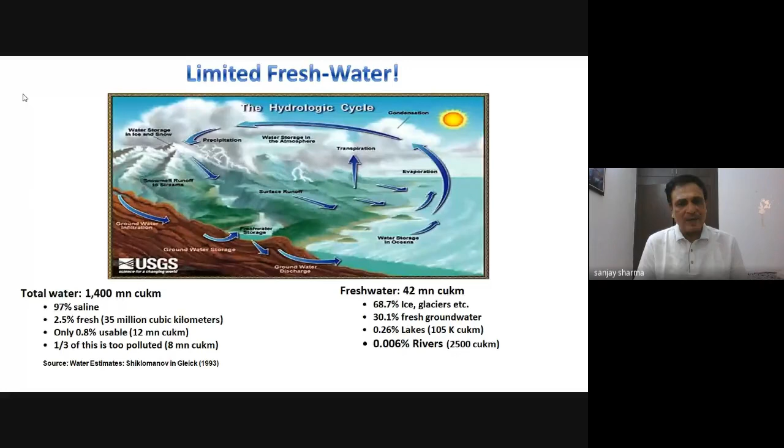If we talk about the availability of fresh water, no doubt our earth is almost 97% covered by water, but availability of fresh water is very, very less. The total water is 1,400 million cubic kilometers, and the fresh water is only 42 million cubic kilometers.

And the thing is that the same water that existed on Earth billions of years ago still exists today. But two or three days back there was news that glaciers are breaking down, and the California fire, because of the rise in temperature, etc.

So the balance I am talking about is that whatever the input is, the output is globally in balance. We have precipitation, then we get runoff, some part evaporates, goes to the sea, and precipitation occurs again. If you total up these things, it will be almost constant.

But what is happening in between is that this storage is missing. This particular ΔS value is missing in this equation. I said it is balanced, but you will find it is not exactly balancing; some amount is missing. That amount is ΔS, the water storage change.

So locally the input and output should match, and here this ΔS should come into the picture. That is what is happening: precipitation, soil storage, evaporation, runoff, discharge, etc.

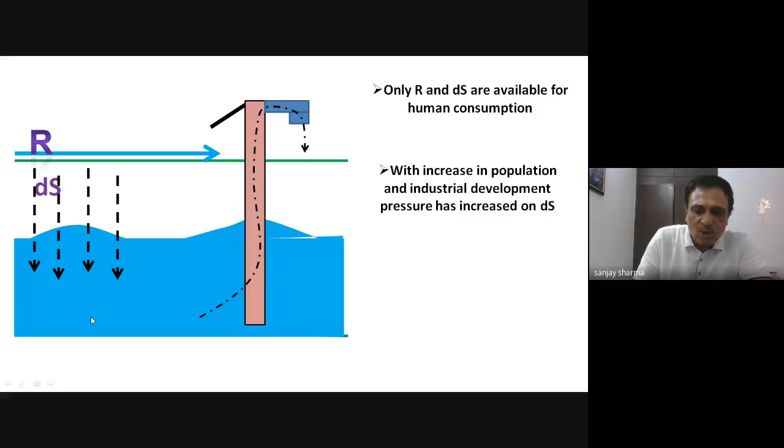So you can see that, just shown in an animated manner, water going underground is sometimes available for consumption, but with the increase in population and industrial development, pressure has increased on this, and in most locations, in particular in our country, this groundwater storage is also going down. So the aquifer is emptying. With increasing population, the stored water has already been consumed.

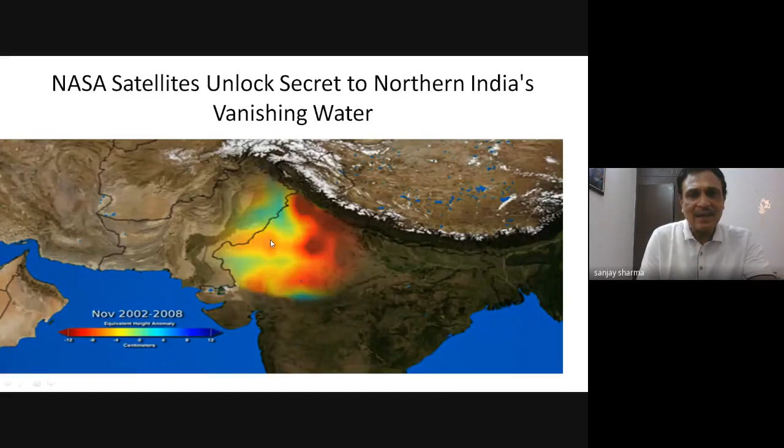So in our country the problem is that we get a good annual rainfall, but the storage capacity of India versus the world is very low. In India, we can only store up to 30 days of rainfall, whereas in developed countries like the US and Australia, they can store up to 900 days of rainfall. So that is what is happening.

Sorry, automatically it is going.

So regarding water availability, we all understand the reasons: vast development, urbanization, population outburst, elevated living styles, inadequate water supply arrangements, decrease in rainfall, and excessive withdrawal of groundwater. In most of our cities, we don't get water supply more than 8 hours per day, and many cities get about 3 hours per day. So there is this shortage in water supply.

And like Cape Town, which was declared a zero water city by March 2020, I think, many of our bigger cities, Bengaluru, Delhi, Mumbai, Kanpur and others, have been listed under zero water in the coming few years. This is the Earth's water distribution we have shown earlier. Only 3% is freshwater, though it is a blue planet.

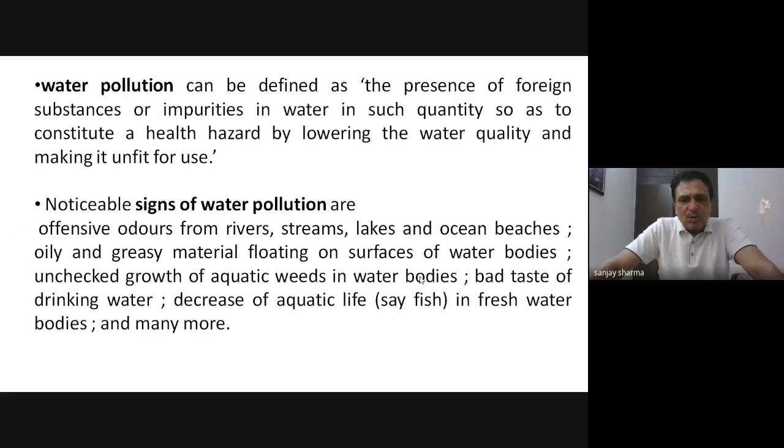The same thing has happened with our freshwater bodies. First it was contamination, and now it is pollution. Our major water bodies are not fit even for aquatic life. So whatever the signs of water pollution in river water bodies, we must take actions to control water pollution.

So if we go into the sources of water pollution, there are natural sources of pollution because of the weathering of rock, soil integrity and leachate from animal excreta. Then agriculture pollution due to utilization of fertilizer, insecticides and pesticides. Then mining pollution of water due to mining, and municipal pollution of water due to sewage.

Mostly in our country, 80% or 90% of the problem is due to municipal pollution from wastewater being thrown into water bodies. Industrial pollution of water is also because of effluent from industries being thrown into our water bodies, and sometimes accidental spillage happens, like oil spillage or industrial spillage.

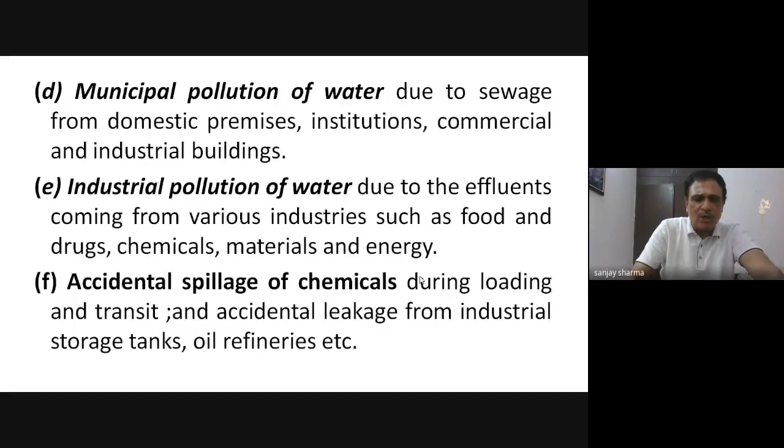So these parameters basically impact water quality. Most diseases, about 80%, are water related diseases, and the impact of water quality on humans is very drastic. So you have health effects of poor water quality, waterborne diseases, water related diseases, and then usability effects of water quality include reduced availability, expensive treatment, economic unavailability, and effects on vulnerable populations, so poverty and the privacy and dignity of women.

Recently I have seen a simple wheel-based system where women can use it instead of carrying buckets on their heads, so they can use this wheel-based system for bringing water from the lake. And then aquatic life is also getting protected.

So basically our water problem is fast becoming a hunger problem also. 1 in 5 people do not have access to safe drinking water, and according to the UN, a child dies from a water-related disease every 15 seconds. So we have kept a Millennium Development Goal to improve our sources of drinking water and sanitation by 2025. To achieve that goal, we need treatment.

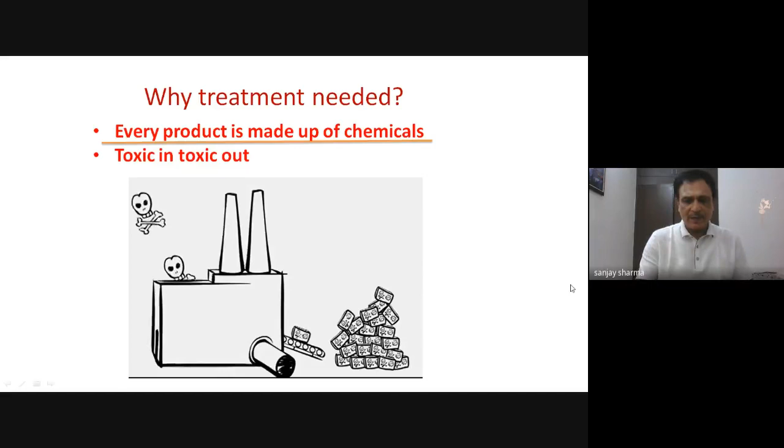So whatever we are doing, we get this outcome: if you put in something A, you get two things, B plus C. B is a useful product, and C is your waste product. That waste has always been a problem for human beings, but we are trying to control it, those terrorists and all that are killing lesser numbers of people than those being killed by our polluted water. And that is affecting us genetically also, as civilization is getting affected.

So for water availability, we have to see one is the judicious and efficient use of water, that is avoiding wasteful water use. With more wastewater production, we must think that whatever it is, it is not a waste, but it is a resource.

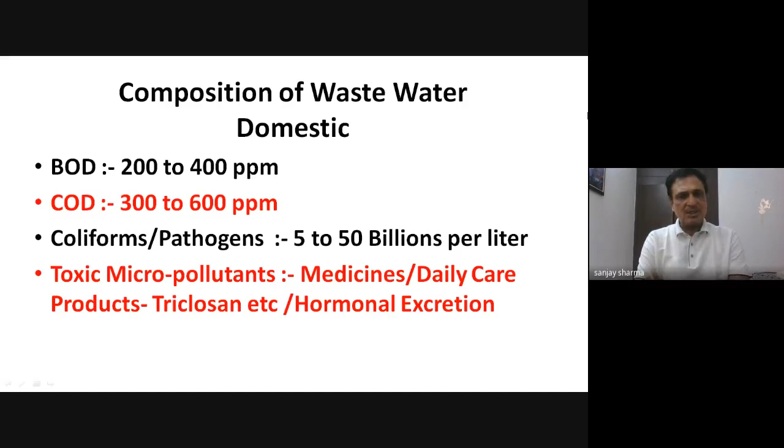So whatever waste we are generating gets circulated. 80% of water sources are highly polluted because of pollution as we have seen. When we come to the composition of wastewater, like domestic wastewater, we generally get BOD in the range of 200 to 400, COD 300 to 600, coliform pathogens ranging from 5 to 50 billion per liter, and sometimes toxic micropollutants which come from medicines, daily care products, etc.

Under the Swachh Bharat Abhiyan, we are trying to achieve 100% removal of open defecation, but work still needs to be done in this area. If you look at the urban and rural comparison of sanitation status, you find that septic tank availability is very less, piped sewer supply is again very less, and open defecation is again very high.

Ventilated systems are again lacking. If you compare rural and urban areas, the margin is very much there. But compared to our bigger cities, our smaller towns don't have treatment facilities, water treatment facilities.

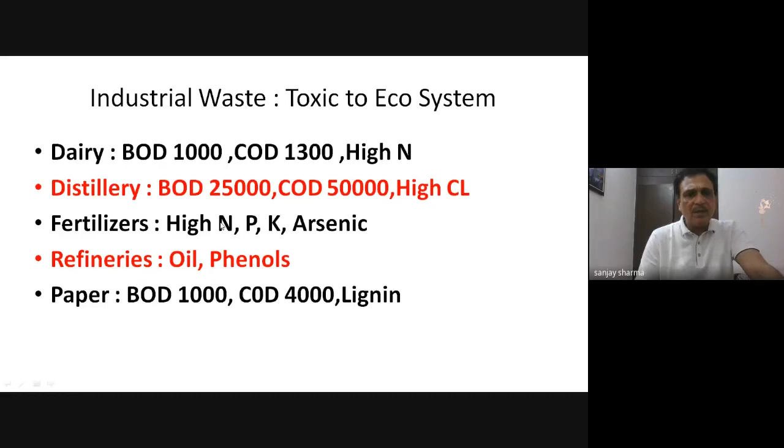Petrochemicals, pharmaceuticals - in tanneries the problem of chromium is coming, and in textiles also the problem of chromium is there.

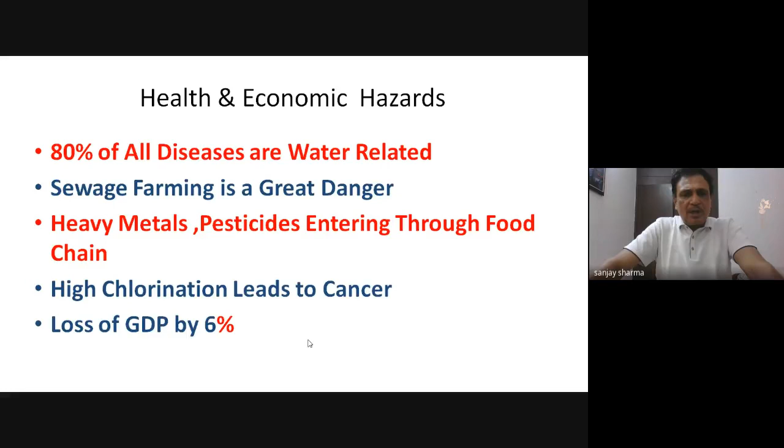We have already said that 80% of all diseases are water related. Sewage farming is a great danger. Heavy metals and pesticides enter through the food chain, and high chlorination leads to cancer. The loss of GDP is about 6%, and that is the economic impact due to poor sanitation on different sectors.

There are ecological hazards causing problems - your lakes, rivers, groundwater are severely contaminated. Ecological deterioration is taking place, and many industries are directly injecting liquid waste into the groundwater. Now, though NGT is acting very harshly on all this, you still find these situations in some areas.

In India, wastewater generation from 498 Class 1 cities is about one-third, and 410 Class 2 towns about one-fourth of the total. Out of the Class 1 cities, domestic generation is almost 36,000 million liters per day, and treated is only about 12,000, one-third.

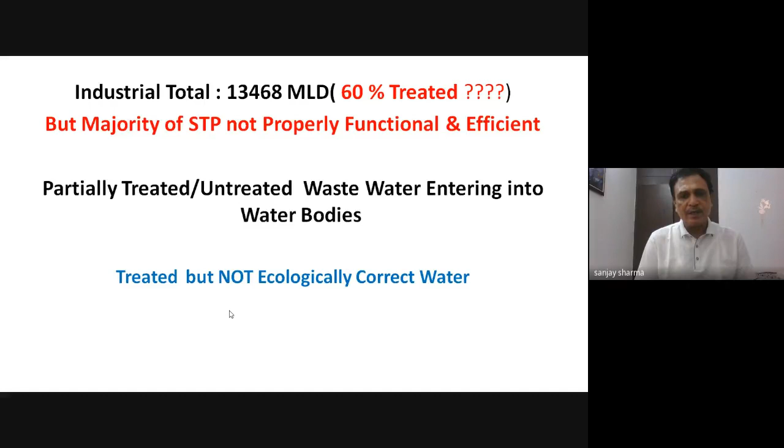Similarly for Class 2 cities, about 2,500, and there, because of septic tanks etc., the treatment facility is comparatively less. Industrial treatment is also very much less, but the major issue is that most STP plants are not properly functioning and efficient. Sometimes water is partially treated, sometimes untreated wastewater enters the water bodies - so treated but not ecologically correct water is entering the water bodies.

So basically, in terms of wastewater management, we have to think in terms of reducing, restoration, and regeneration of the system. We need not just treatment, but ecologically correct treatment. Wastewater management is about eco-correction and restoration of the wastewater.

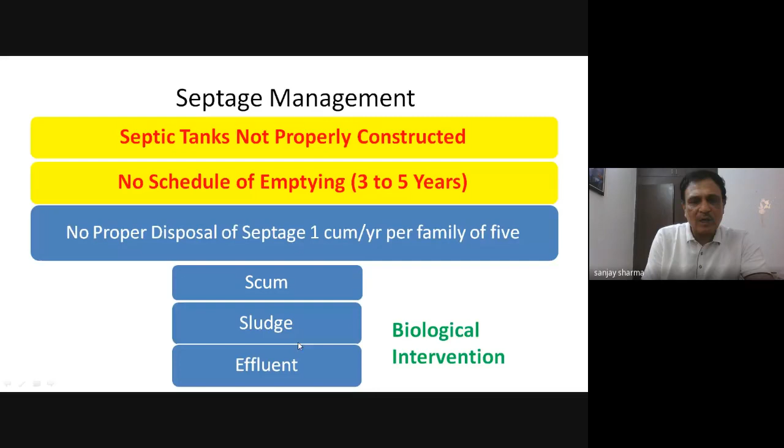This situation shows that about 50% of our population is using septic tanks. And if you look into septic tank management, the problem is that proper treatment is not there, regular maintenance is not there, and even the sludge and effluent is not being properly managed.

There are a lot of treatment technologies, conventional and other systems, which we will discuss a little later. You have various aeration processes - MBR, MBBR, SBR, UASB reactor, etc., which are being installed, but their installation cost is very high, and operation cost is also very high.

Eco technology means we are establishing a food chain, bringing in the correct type of system into bioremediation. We are starting with bioremediation, applying green plants etc.

To take care of our wastewater or sewage generated, these are in-situ treatment systems which are easy to operate and do not require major modifications of the drain. Naturally occurring microbial bacteria are used in the treatment process, activated to degrade the sewage in flowing condition without diverting the flow, and no additional land or power is required.

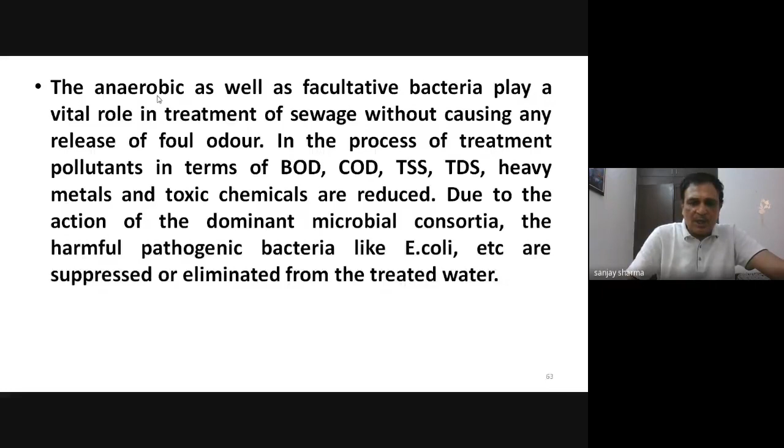Both anaerobic as well as facultative bacteria play a very vital role in sewage treatment, and most treatment plants are working on this particular system only. So eco restoration of the system is very, very important.

We can put some eco plants along the rivers and floodplains, so that whenever any sort of problem arises, they can take control of the system. Various plants can be grown for this; we are not going into detail but I have just listed them.

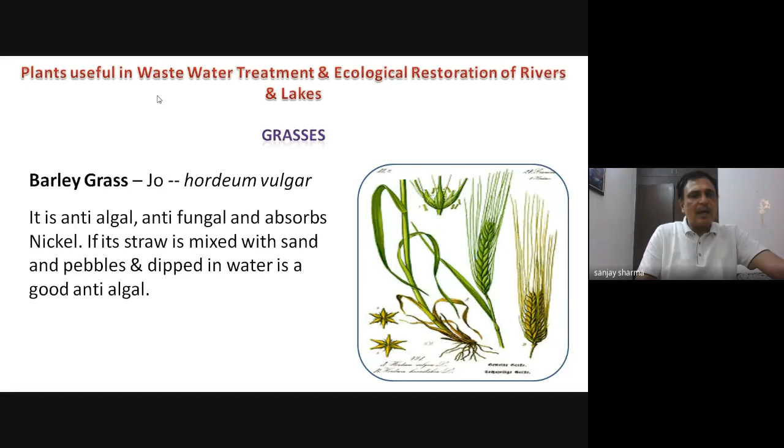Here is lemongrass, barley grass. These types of plants have been found to have antifungal properties, anti-algal properties, and they also absorb heavy metals.

Cana grass is good for heavy metals and trace elements absorption from water and soil. Then you have the shrub called khana jaldi, which has an antibacterial, antifungal effect. And this is Guggal.

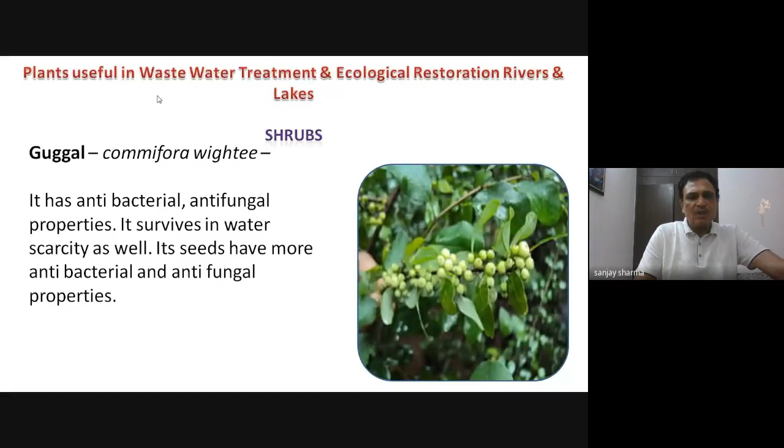It has antibacterial, antifungal properties and survives in water scarcity as well. Its seeds have more antibacterial and antifungal properties. Then there is mal kangani, a particular plant whose roots accumulate the particulates floating in the water around it.

This is again Kulthi. It has an anti-sludge property, aids organic matter decomposition, and promotes aerobic bacteria. And Marva shrubs also have an antibacterial property.

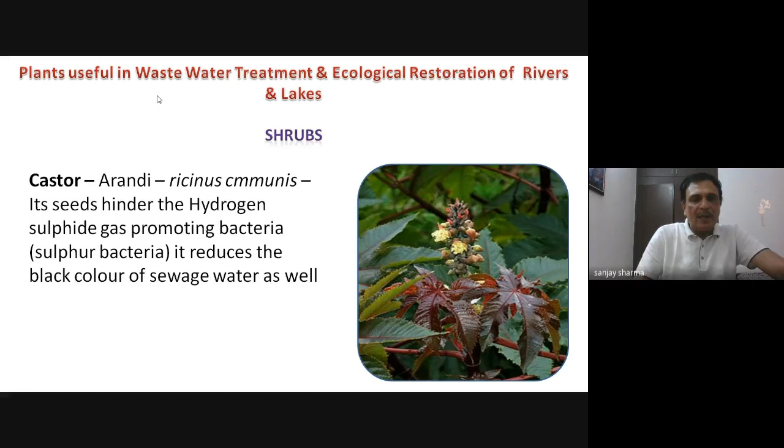Castor is the one which hinders hydrogen sulfide gas promoting bacteria, and reduces the black color of the sewage water as well. Herbs have antifungal property and help develop the food chain in water bodies.

Then again Adusa has antifungal, antibacterial properties. Then you have drumsticks, which again have antibacterial, anti-turbidity properties.

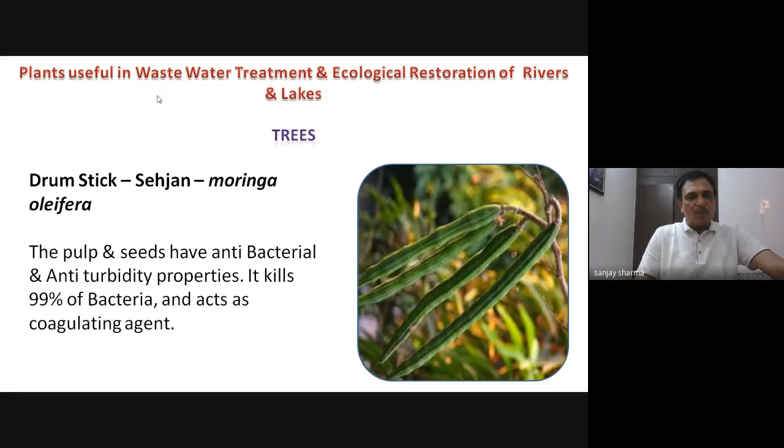It removes 99% of bacteria and acts as a coagulating agent also. Similarly, a certain tree helps in removing fluoride. This tree also removes the fluoride.

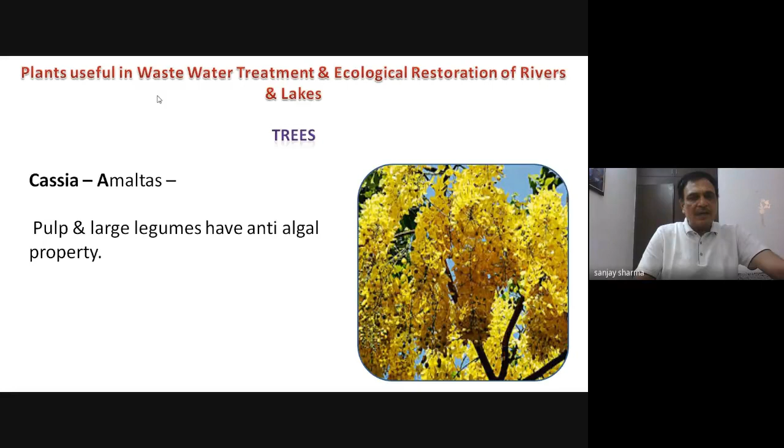So I think along with the drains, if we put these seeds into our drains, automatically many of the pollutants present in the water get reduced.

But at the same time, when we are going forward, we have to manage our water quality in terms of chemical properties, physical properties, biological processes, and hydrological processes like flow. All these parameters have to be considered in our water treatment to bring the water to good quality.

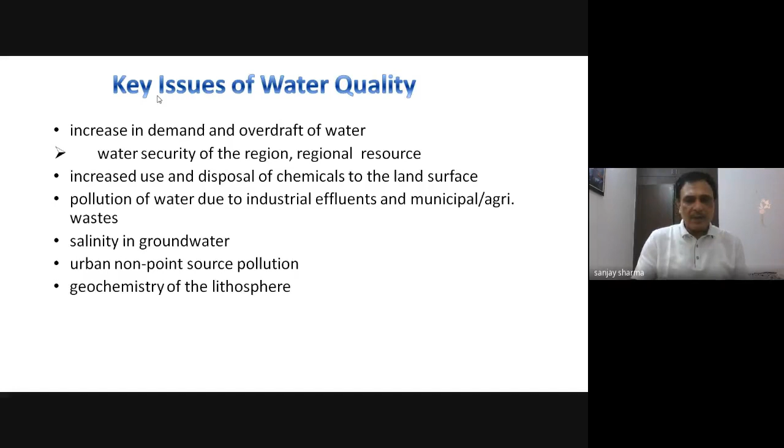We have to address water quality issues with respect to increase in demand and overdraft of water, water security, salinity of the groundwater, urban non-point sources, and geochemistry of the lithosphere. We have point sources and non-point sources; point sources we are able to figure out, but non-point sources, basically from agricultural fields, are difficult to identify.

Sector-wise also we have to see that there are many industrial sectors, and we have to consider in wastewater treatment what are the wastewater contaminants.

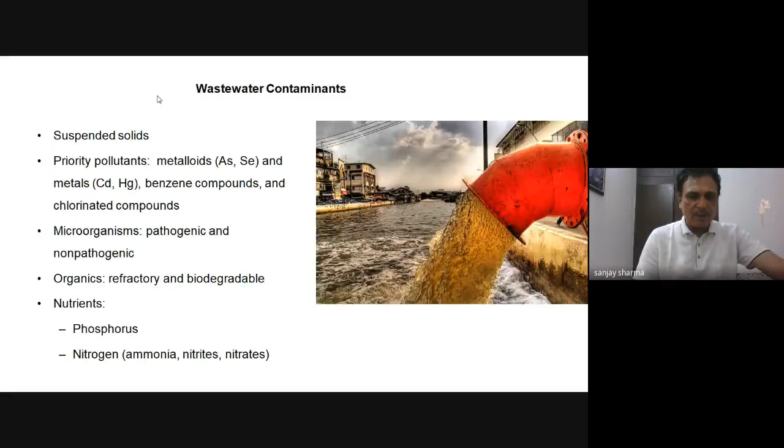In this, I think we have to maybe classify them as suspended solids, then other priority pollutants like your metalloids and metals, benzene compounds and chlorinated compounds, microorganisms which may be pathogenic and non-pathogenic, organics, refractory and biodegradable, nutrients, phosphorus and nitrogen in the form of ammonia, nitrates and nitrites.

So this is what basically you can see, that the major contaminants are like your suspended solids. They lead to the development of sludge deposits and anaerobic conditions when untreated wastewater is discharged into the aquatic environment. Nutrients, your phosphorus, nitrogen, carbon, when discharged into the aquatic environment, can lead to growth of undesirable aquatic life. When discharged in excessive amounts on land, they can lead to pollution of the groundwater.

Priority pollutants are organic and inorganic compounds selected on the basis of their known or suspected carcinogenicity or high acute toxicity. Many of these compounds are found in the wastewater. They mostly come from the industries. Then refractory organics: these organics tend to resist conventional methods of wastewater treatment. They show poor degradation. Typical examples include your phenols and agricultural pesticides.

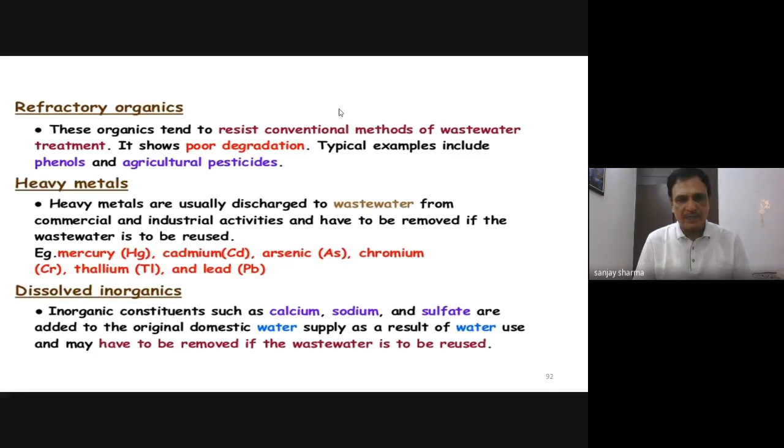Heavy metals, again coming from industrial activities, can be mercury, chromium, arsenic, and heavy metals are most difficult to remove. Dissolved inorganics may consist of your calcium, sodium, sulfates, etc. They have to be removed if the wastewater is to be reused.

Then coming to characteristics of our industrial wastewater, sometimes it is thrown into your sewage water also, so we have to take that. Mostly it is composed of floating matter, settleable matter, colloidal matter, and matter present in the solution. So different types of solids are there: suspended solids, non-settleable, settleable. They may be volatile, fixed, and all that. So we have to see that the solids present in the water are of a different nature.

Then odors are also coming. Temperature from the industrial wastewater is one parameter. Then color is again one of the issues in our thing.

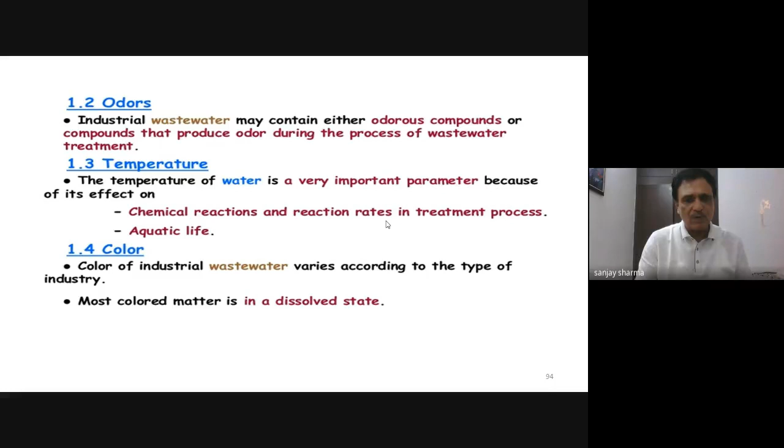So color is again one of the issues where, if it gets into our water, it is very difficult to remove. Then turbidity is being added because of the suspended matter being thrown. Then your organic matter, again coming from some industrial situations. When we are talking about the organic content, biochemical oxygen demand, the determination of BOD, maybe 5 or 3 days, involves the measurement of oxygen used by microorganisms in the biochemical oxidation of the organic matter.

So BOD is a chemical procedure for determining the amount of dissolved oxygen needed by aerobic biological organisms in a body of water to break down organic material present in the given water at a certain temperature over a specific period of time. It can be BOD 5 at 20 degrees centigrade, but it can be BOD 3 also at 27 degrees centigrade. It is widely used as an indication of the organic quality of the water, most commonly expressed in milligrams of oxygen consumed per liter of the sample during 5 days.

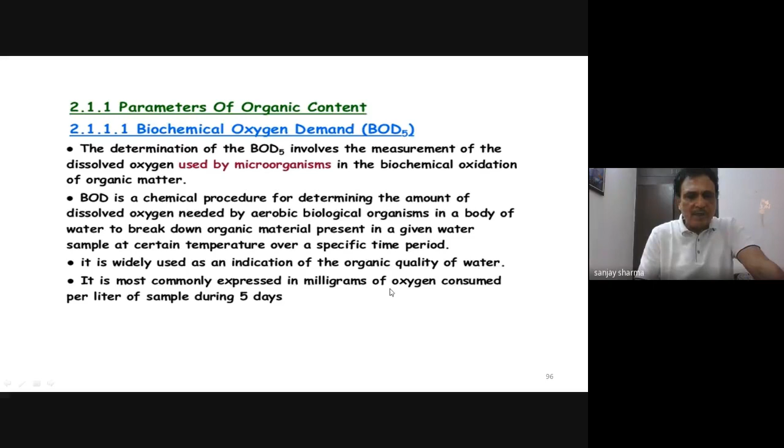COD is also used, to oxidize the organic matter through a reaction with a mixture of dichromate and sulfuric acid at high temperature. COD of the wastewater is in general higher than that of BOD 5 because more compounds can be chemically oxidized than can be biologically oxidized. This can be very useful because COD can be determined in 3 hours as compared to BOD for 5 days.

Then inorganic matter, nitrogen, phosphorus, sulfur, these heavy metals, and biological characteristics like your pathogens, which are coming from the slaughterhouses and maybe some starch and yeast factories, etc., which are throwing these pollutants into our water bodies. In order to take care of these pollutants, we have to go for wastewater treatment methods, and these treatment methods we may classify based on physical unit operations.

These physical unit operations, we all know: screening, mixing, flocculation, sedimentation tanks, flotation, filtration, and gas transfer are the typical unit operations which fall under the category of physical unit operations. Coming to the chemical unit processes, these are the treatment methods in which removal or conversion of contaminants is brought about by addition of chemicals or by other chemical reactions. Precipitation, adsorption, and disinfection are the most common examples used in wastewater treatment.

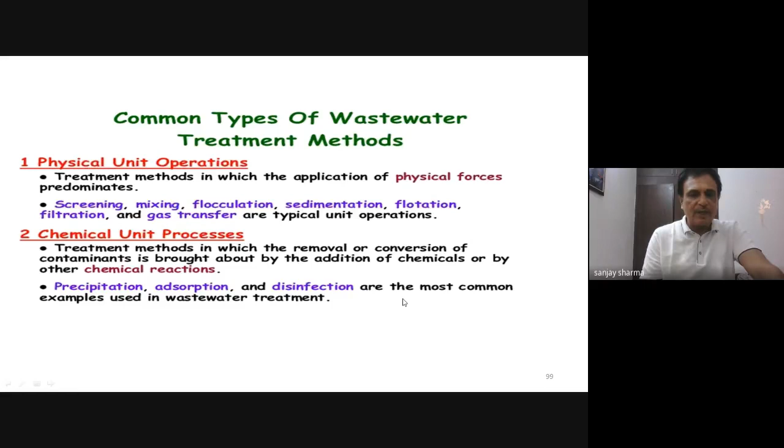Then biological unit operations, where most of the contaminants are removed. Treatment methods in which the removal of the contaminant is brought about by biological activity fall under biological unit operations.

This treatment is used primarily to remove the biodegradable organic substances, maybe colloidal, maybe dissolved, and nutrients, nitrogen and phosphorus, from the wastewater. Basically, these substances are converted into gases that can escape to atmosphere, and into biological cell tissues that can be removed by settling. So these are our main treatment units.

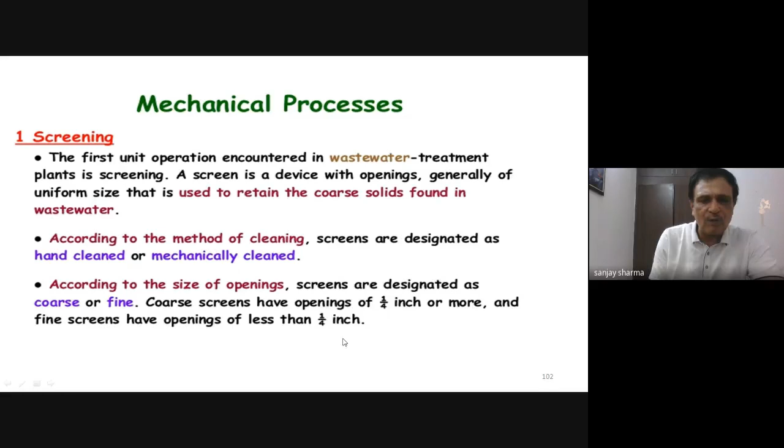One is the screening. The first unit operation encountered in the wastewater treatment plant is screening. A screen is a device with openings, generally of uniform size, that is used to retain the coarse solids found in the wastewater. According to method of cleaning, screens can be designated as hand cleaned or mechanically cleaned, and according to size you can classify them as coarse and fine screens. Coarse screens have openings of 1/4 inch or more, and fine screens have openings of less than 1/4 inch. And these are the mechanical screens. They are used particularly to remove the floatable matter in the system.

Then oil separation is also one of the issues. It is a process in which floatables, namely free oil, and the organics separate from the wastewater. So this is the separator. The design of this separator is based on the specific gravity difference between the oil and the wastewater, and between the suspended solids and the wastewater. In general, this separator can handle very large flow. However, its disadvantage is the long retention time required for efficient oil separation. So basically, you require a very long tank.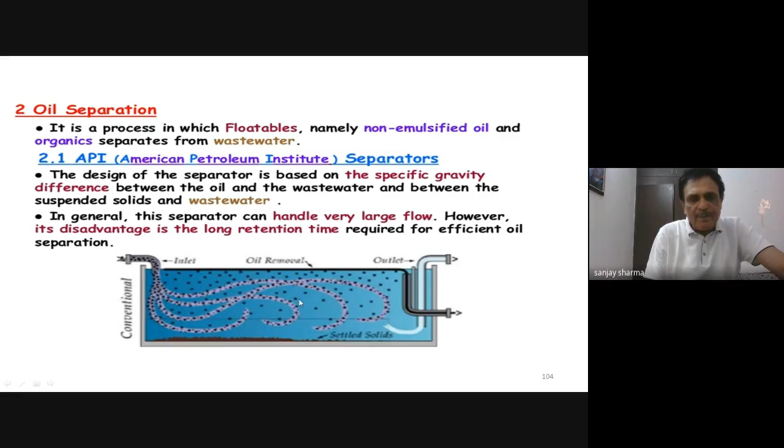The next technique being used is flow equalization. This is used to overcome the operational problems caused by flow variations, to improve the performance of the downstream processes, and it is also used as an emergency tank to equalize wastewater effluent in case of any process failure in the treatment process. The design must provide sufficient mixing to prevent solids deposition and concentration variation, and also provide aeration to prevent odor problems. The best location of the equalization facility depends on the existing and proposed treatment plant sites, and in some cases equalization after primary treatment and before biological treatment may also be appropriate.

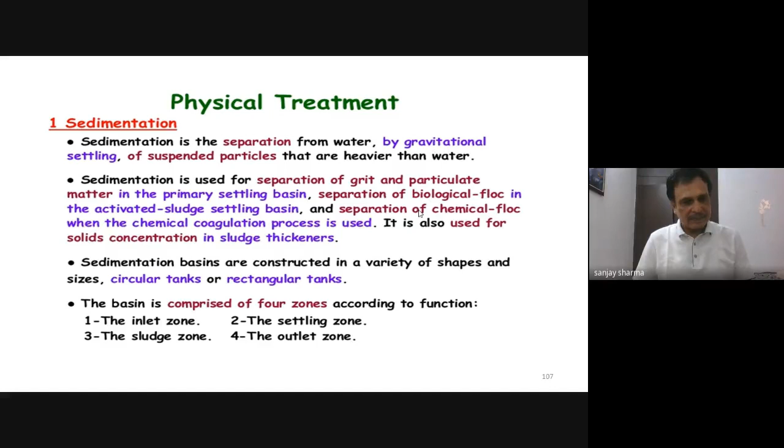The basin is comprised of 4 zones according to function: inlet zone, settling zone, sludge zone, and outlet zone. The inlet zone is the region where the incoming suspension is distributed uniformly over the cross section of the tank. In the settling zone, the particles settle at the same rate as they would in a quiescent manner. In the outlet zone, the clarified liquid is collected uniformly over a cross section of the basin, and the solids collect in the sludge zone.

Then flotation is the next process. It is the unit operation which is used to separate solid or liquid particles from a liquid phase. Separation is brought about by introducing fine gas, usually air bubbles, into the liquid phase. The bubbles attach to the particulate matter and the buoyant force of the combined particles and gas bubbles is great enough to cause the particles to rise to the surface to form a scum blanket.

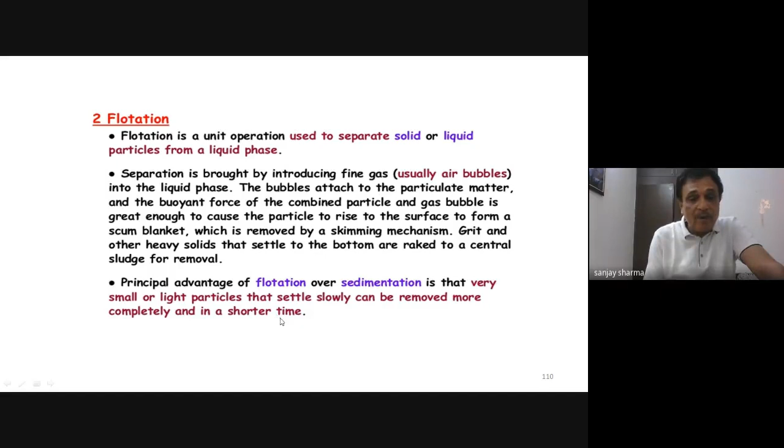Then coming to the next, chemical treatment. In chemical treatment, first is neutralization, which is important in the case of water coming from industries. They have to control the acidic or alkaline components before discharging or before taking it for treatment. For wastes which are discharged to receiving water, a pH between 6 and 9 is frequently specified by the regulatory agencies. For waste entering a biological treatment process, the pH should be maintained between 6.5 and 9 for optimum growth of microorganisms.

Acidic waters are commonly neutralized with waste alkaline streams or lime, dolomite, ammonia, caustic soda, soda ash. Lime is the most widely used alkaline material for neutralization of acid waste because of its low cost. Lime may be slow to react and may form insoluble precipitates. Alkaline waste usually requires treatment with a waste acidic stream, or sulfuric acid or hydrochloric acid.

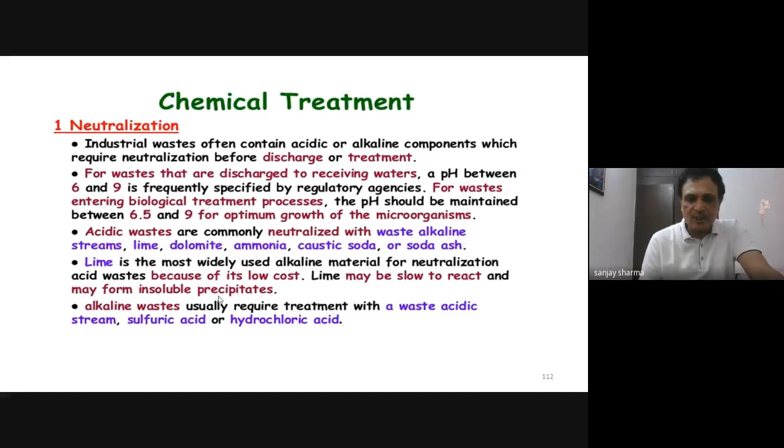We may now talk about oxidation and reduction. Oxidants are used in wastewater treatment as a first step in the removal of heavy metals, to oxidize organics, or as a first step in a treatment process to oxidize odoriferous compounds such as hydrogen sulfide, or to oxidize inorganics such as cyanide, and for disinfection. Common oxidizing agents used in wastewater treatment are oxygen, chlorine, sodium hypochlorite, calcium hypochlorite, potassium permanganate, and hydrogen peroxide.

Chemical precipitation involves the addition of chemicals to alter the physical state of the dissolved and suspended solids and facilitate their removal by sedimentation. Basically ionization occurs. In the common case of aluminum sulfate, aluminum and sulfate separate into positively and negatively charged particles. These particles get attached to opposite charges, become heavier and settle at the bottom. That is the coagulation process. The primary function is to mix the chemicals. Some most commonly used coagulants are alum, ferrous sulfate, lime, ferric chloride, and ferric sulfate.

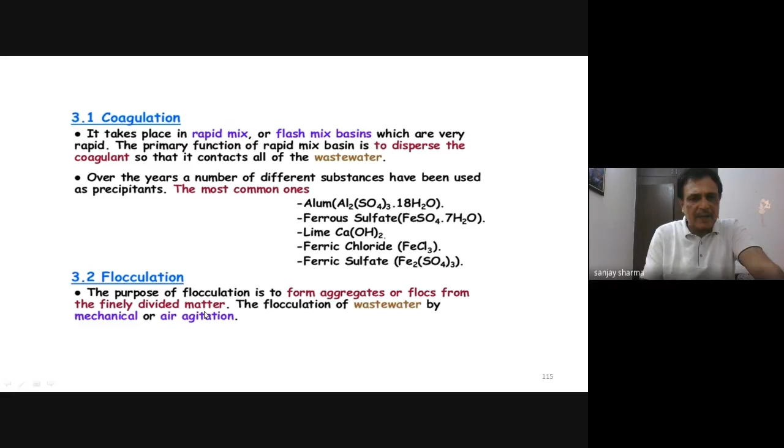From 80 to 90% of the suspended solids, 50 to 80% of BOD and 80 to 90% of the bacteria can be removed by chemical precipitation. In comparison, when plain sedimentation is used, only 50 to 70% of the total suspended matter, 20 to 40% of BOD, and 25 to 75% of bacteria can be removed. So the coagulation and flocculation process improves the efficiency.

Then this is again a physicochemical treatment which we call the dissolved air flotation system. Air is intimately contacted with an aqueous stream at high pressure, dissolving the air.

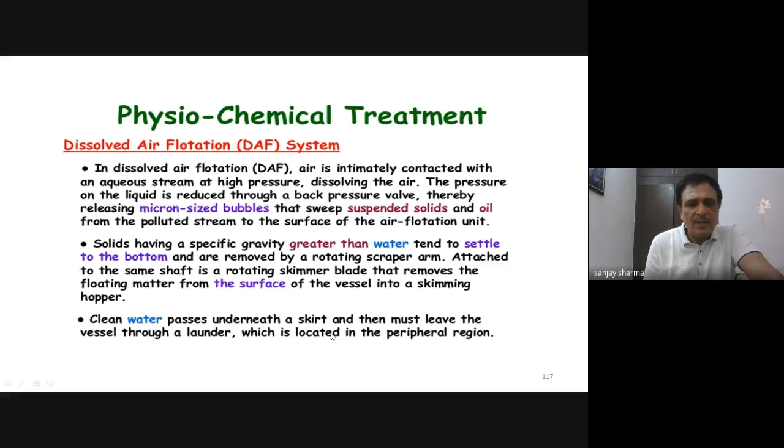That is what I said, the same diffuser system. The pressure on the liquid is reduced through a back pressure valve, thereby releasing micron-sized bubbles that sweep suspended solids and oil from the polluted stream to the surface of the air flotation unit. Solids having a specific gravity greater than water tend to settle at the bottom and are removed by a rotating scraper arm. Attached to the same shaft is a rotating skimmer blade that removes the floating matter, and clean water passes underneath a skirt and then must leave the vessel through a launder which is located in the peripheral region.

Then coming to biological treatment units, basically there is aerobic treatment and there is anaerobic treatment. Under aerobic biological treatment, the activated sludge process is a very common technique used for secondary treatment, and in this system we are using a tank for wastewater aeration followed by a settler and a solids recycle system. The wastewater flows through under constant aeration in the presence of activated sludge and exits at the end of the tank after 4 to 8 hours of residence time.

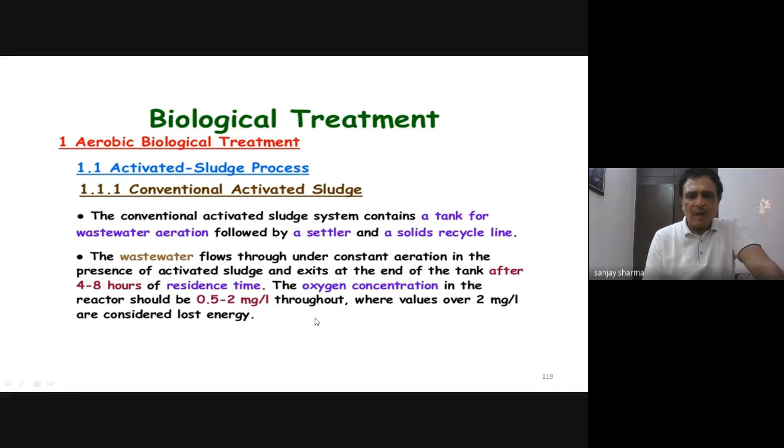Then you have the SBR, sequential batch reactor system. Here the unit processes involved in the SBR and conventional activated sludge process are identical. Aeration and sedimentation clarification are carried out in both systems, but in conventional plants the processes are carried out simultaneously in separate tanks, whereas in SBR operation the processes are carried out sequentially in the same tank. As currently used, all SBR systems have 5 steps: fill, react, settle, draw, and idle.

A unique feature of the SBR system is that there is no need for a return activated sludge system because both aeration and settling occur in the same chamber. So no sludge is lost in the reaction step, and none has to be returned from the clarifier to maintain the sludge content in the aeration chamber. So basically all the processes take place in the same tank.

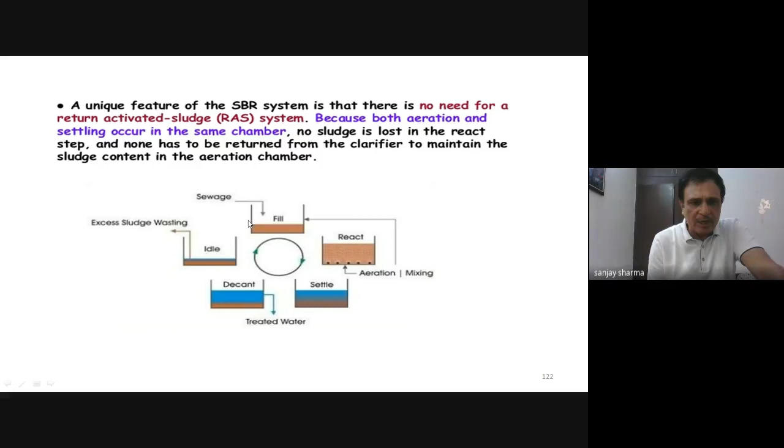Then you have the trickling filter system, which consists of a highly permeable media to which microorganisms are attached and through which wastewater is percolated or trickled. The filter media usually consists of either rock, slag may also be used, or a variety of plastic packing materials. Rock filter beds are usually circular and liquid wastewater is distributed over the top of the bed by a rotary distributor, and wastewater is allowed to contact the media. The collected liquid is passed to a settling tank where the solids are separated from the treated wastewater.

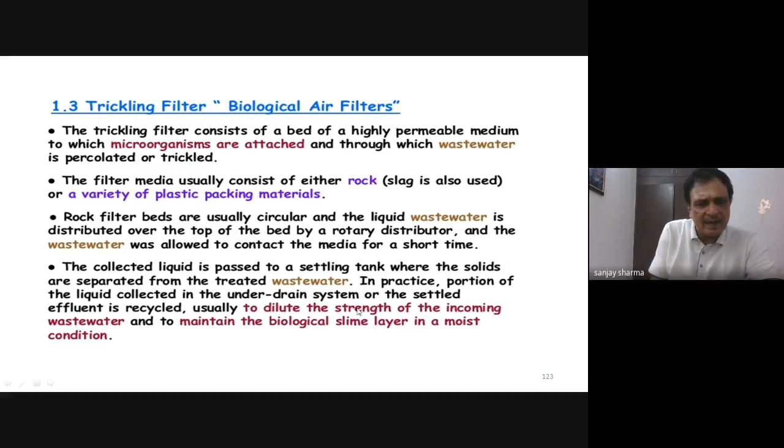And sometimes the underdrain water, the effluent, is also recycled, and we just have to keep this proper. So this is the trickling filter. Basically, limitations of the trickling filter include a relatively high incidence of clogging, long rest periods are required, and relatively low loading can be used.

These systems are mostly based on aerobic treatment. Another type of treatment is the anaerobic biological treatment system. Anaerobic processes have been developed for the treatment of sludge and high strength organic loads. A disadvantage of the anaerobic system is that the slow growth rates require a relatively long retention time in the digester for adequate waste stabilization to occur.

On the other hand, most of the organic waste is converted to methane gas, which is combustible and therefore a useful end product. The high temperature necessary to achieve adequate treatment is often listed as a disadvantage of the anaerobic treatment process. However, high temperatures are necessary only when a sufficiently long mean cell residence time cannot be obtained at the nominal temperature.

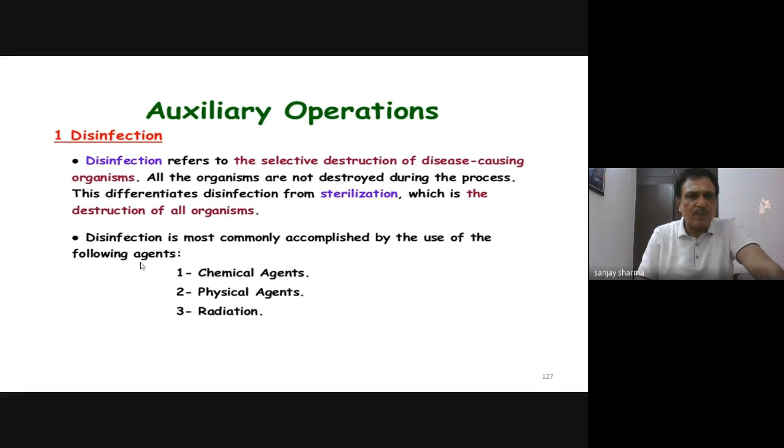Nowadays, we are clubbing the system into primary, secondary, and tertiary treatment. Now we are moving towards the zero discharge system. So whatever water we are treating has to be utilized for other useful purposes. It may be for irrigation, irrigating lands, valleys, or gardens in the city, or it can be used in the dual plumbing system also.

So basically, like in the green building concept, even the National Building Code 2016 is very clear that every building is to be provided with a dual plumbing system. In Chandigarh, any building having more than 500 square yards has to be given a tertiary treated water connection. So you cannot directly use tap water, potable water, for your irrigation purposes.

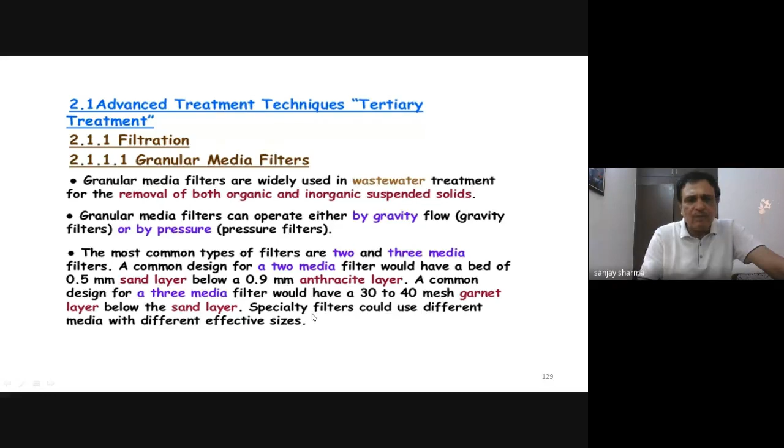Solids are captured by the bed and eventually have to be removed by scouring and backwashing. Like in filters, you understand the working of the rapid sand filter also. When the filter media gets clogged, you have to backwash it.

Then carbon adsorption is very useful to remove certain types of organic contaminants that are resistant to primary and secondary treatment, where such removal is required. There are some cases where an organic stream contains contaminants valuable enough to recover with carbon adsorption. Another use of carbon columns is to remove volatile organic compounds from wastewater. All VOCs can be adsorbed onto activated carbon to a greater or lesser extent.

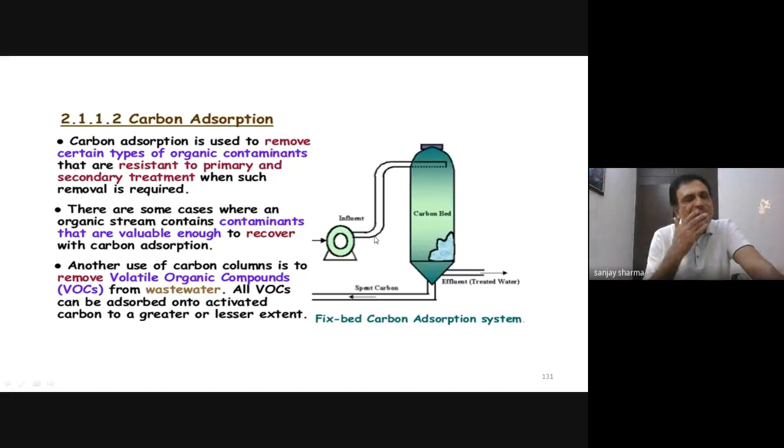So this is the fixed-bed carbon adsorption system. Adsorption processes are again very common for removing heavy metals also.

Another technique is the membrane separation technique. These are the techniques used to remove very fine particles from water to desalinate it, and recently membranes have been developed to remove organics from water also, such as oil and other substances that have clogged and degraded membranes in the past.

Membranes are made of various materials, but all have a consistent pore size that will permit particles or molecules of a given size to pass through the membrane, and will prevent molecules or particles larger than the pore size from passing through.

Then the other issue is sludge treatment and disposal. Sludge is again one of the major problems from the wastewater treatment plant - where to dispose of it, how to use it.

The sludge resulting from wastewater treatment operations and processes is usually in the form of liquid or semi-solid liquid that typically contains from 0.25 to 12% solids by weight, depending on the operations and processes used. Sludge is by far the largest in volume, and its processing and disposal is perhaps the most complex problem facing civil engineers. The problems of dealing with sludge are complex because it is composed largely of substances responsible for the offensive character of untreated wastewater.

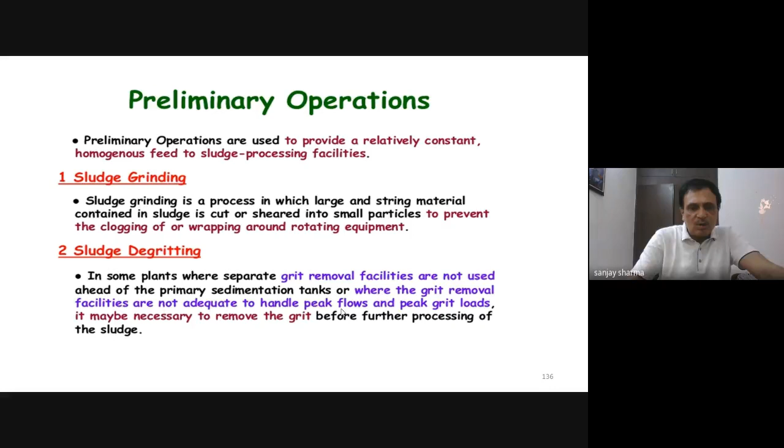Then sludge blending - the sludge from primary, secondary, and advanced processes is blended to produce a uniform mixture to enhance plant operability and performance. Blending tanks are usually equipped with mechanical mixers.

Sludge storage is particularly important in providing a uniform feed rate ahead of following processes like sludge stabilization, heat treatment, mechanical dewatering, drying, and thermal reduction, etc. If sludge is stored more than 2 to 3 days, it will deteriorate and will be more difficult to dewater.

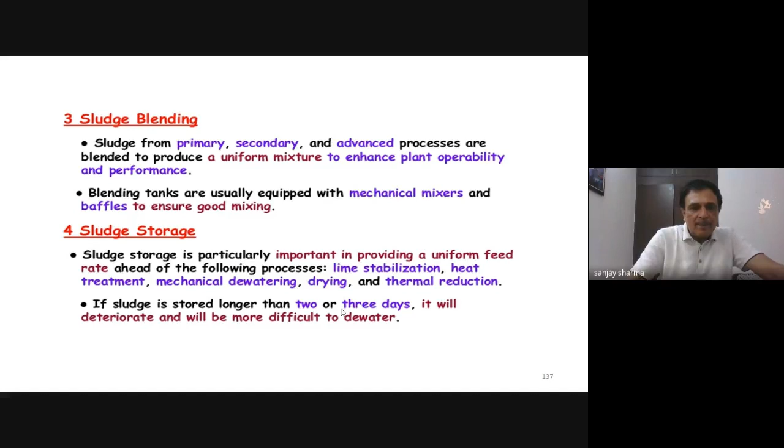Another issue is sludge thickening, the procedure used to increase the solid content of sludge by removing a portion of the liquid fraction. This is done by gravity thickening, accomplished in a tank similar in design to the conventional sedimentation tank - generally a circular tank is used. The supernatant flow that results is returned to the primary settling tank or to the headworks of the treatment plant. The thickened sludge that collects at the bottom of the tank is pumped to the digesters or dewatering equipment as required.

Then you have to resort to sludge stabilization. Sludge is stabilized to reduce pathogens, to eliminate offensive odors, and to inhibit, reduce, or eliminate the potential for putrefaction. The technologies used may be lime stabilization, heat treatment, anaerobic digestion, and aerobic digestion.

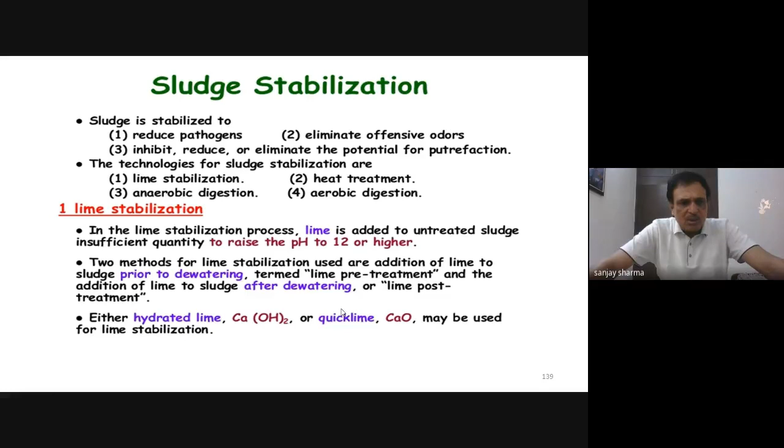In lime stabilization, what we are doing is putting in lime so that its pH is raised to more than 12. The addition of lime can be done either prior to dewatering, which is lime pre-treatment, or after dewatering, which is post-treatment. Either calcium hydroxide or quicklime may be used for lime stabilization.

I think there is some problem with this presentation. Just a minute, wait a little bit. It has not completely come out. I will share another one. Just wait a minute. And we will copy. Okay, I think it has not been copied properly.

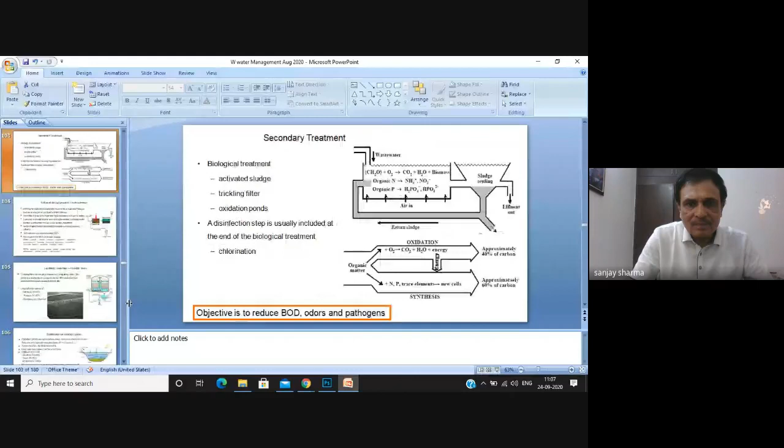Is it visible now? Yes, sir, visible. Okay.

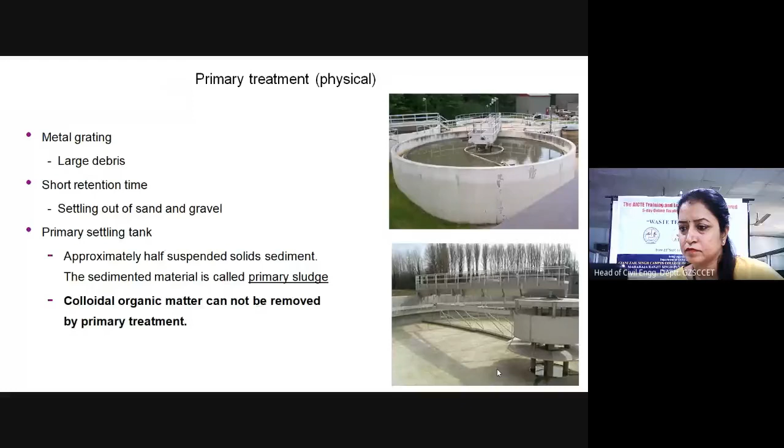So that is what we have been discussing about your wastewater, and I think we have discussed this primary treatment, secondary treatment, and these are the various secondary treatment activities. We discussed all the processes, and we were talking about the different types of reactors in secondary treatment. Then we went into sludge treatment. The various types of reactors used are the SAFF reactor, MBBR, and most commonly, TFEA technology.

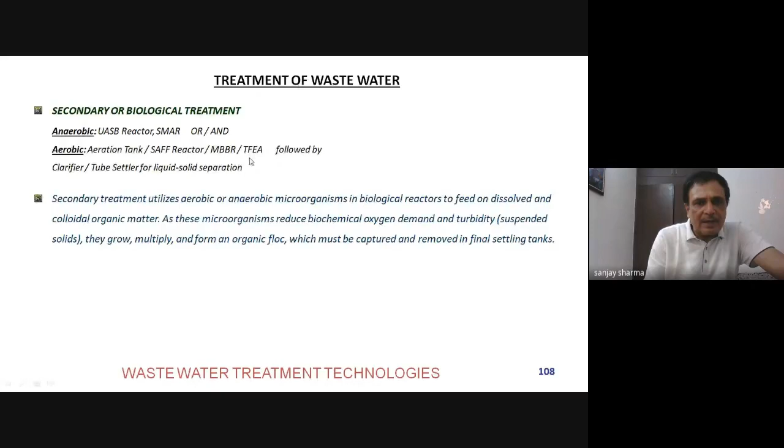So this is a UASB reactor, basically called the upflow anaerobic sludge blanket. It uses an anaerobic process wherein a blanket of granular sludge suspended in the tank gets formed, and wastewater flows upward through the blanket and is processed by anaerobic microorganisms. Here the effluent is taken from the top. This UASB technology is very commonly used nowadays.

If you talk about different types of reactors, water enters through this, passes through the granular sludge, and then goes into the system. Basically, biogas with a high concentration of methane is produced as a byproduct, and this may be captured and used as an energy source.

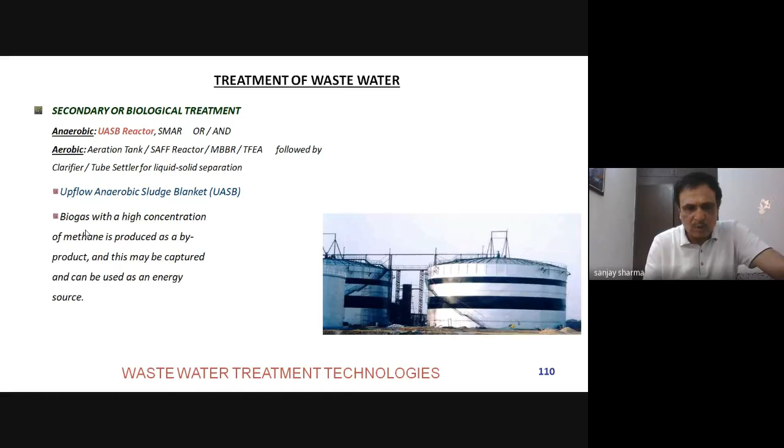I am just giving you details about different reactors, not going into depth, just showing you this. In this UASB reactor, constant monitoring is needed when put into use to ensure the sludge blanket is maintained and not washed out. The contents are required to be kept warm, and heat produced from the byproduct can be reused. So whatever energy we are using can be utilized from the same system.

Then another type of reactor is the SMAR reactor, which we call the submerged media anaerobic reactor. It contains an internal media which supports bacterial growth, using either rocks or synthetic media as a support material. As waste influent flows up through the system, it is digested by bacteria which cling to the surface media.

So here this type of media is provided, and as flow goes through this media, bacteria attach to the surface. They eat up the organic matter, which becomes heavier and settles at the bottom, and effluent is withdrawn from the top. This system is able to resist stress failure due to changing conditions and other factors. Although operating SMAR reactors at high temperature improves efficiency, it is not necessary to preheat the influent waste.

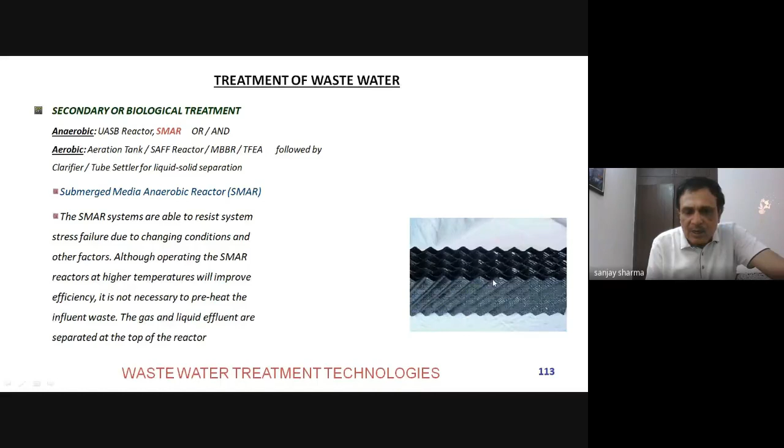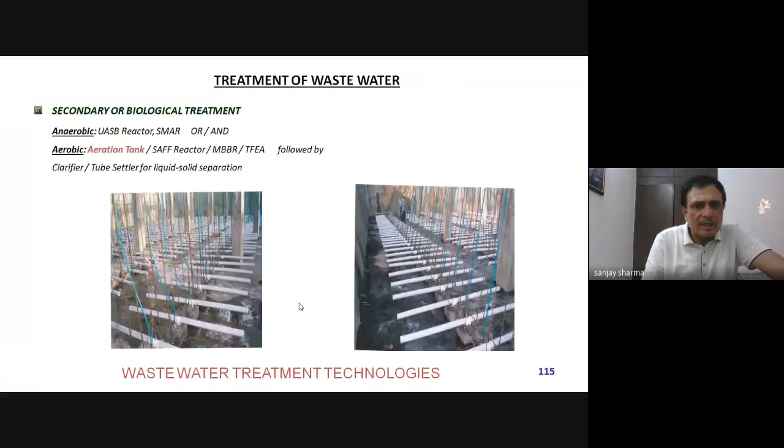So this type of system is provided, flows enter through it, and purification takes place. We have already discussed the aeration tank earlier, so not going into that again. This shown here is basically the tube settler and all that, and this is the SAFF reactor, which we were talking about.

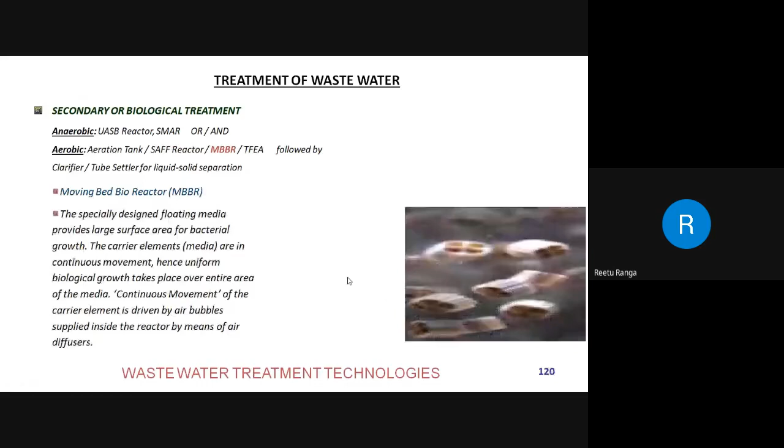This is used in the MBBR technology. This is a type of floating media placed in the water tanks, and their open surfaces become the surfaces to absorb the incoming organic matter. You put this floatable plastic-type media into the secondary aeration tank, and these openings act like small sedimentation tank units. The organic matter gets attached to the filter, becomes heavier, and settles at the bottom. This is the basic principle behind the working of this system.

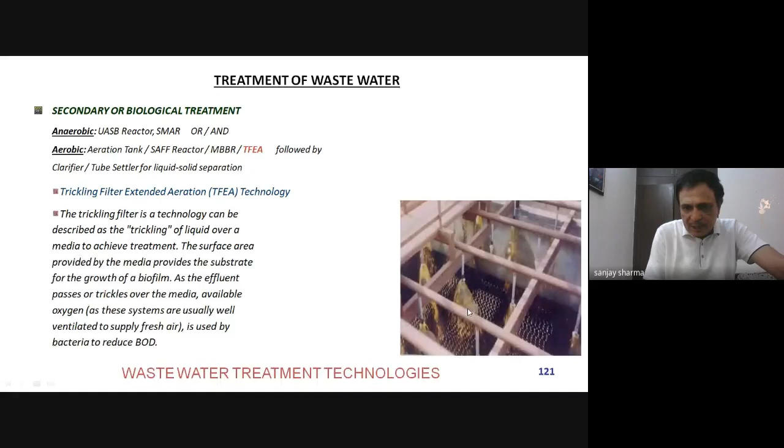Then there is the TFEA technology, trickling filter extended aeration technology. It can be described as trickling of the liquid over a media to achieve treatment. The surface area provided by the media supports the growth of biofilm, and as the effluent passes or trickles over the media, available oxygen is used by bacteria to reduce BOD. The filter media is provided at the bottom, and as it trickles over it, the BOD gets reduced.

Reactions occurring in the media are exothermic, so the hot air goes up and natural cool air moves in from ventilation holes at the bottom. No power is used for supply of air, as natural convection supplies the required oxygen. After passing over the filtration media, the effluent is discharged into the aeration tank.

This is a small unit, basically shown here, which is a picture taken from this Anandpur Sahib heritage sort of site.

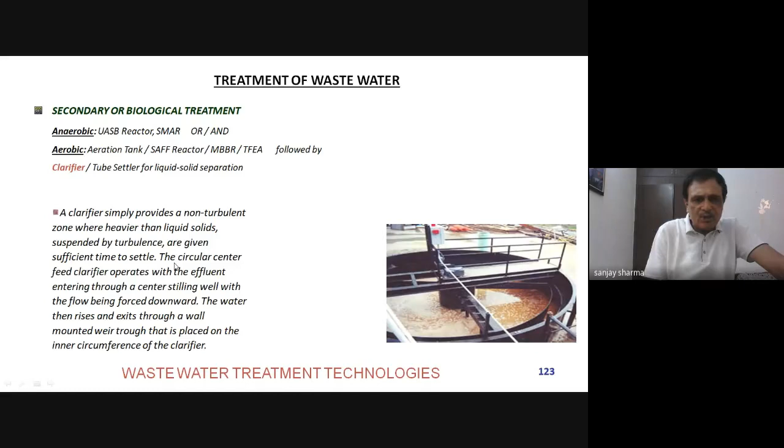These are the clarifiers, which we have already discussed. The same thing is shown here, with skimming and all that together, and at the bottom settlement takes place.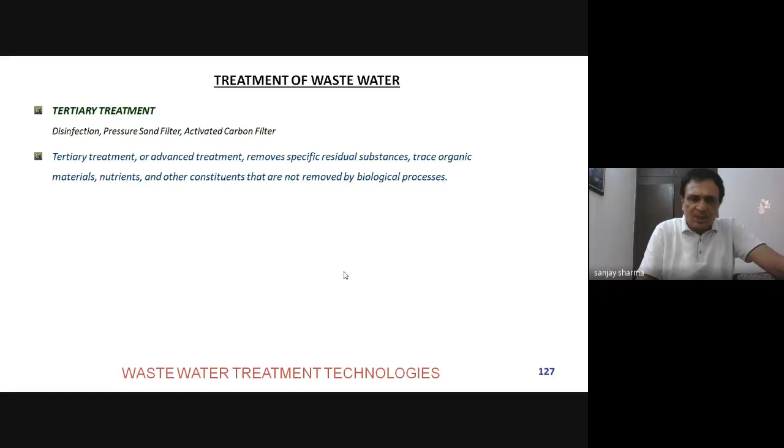So then you have the option available for reusing the treated wastewater. It can be used for municipal non-potable water purposes - I have given the example of Chandigarh. It can even be used for drinking, in many places without people knowing.

If you know, astronauts stay in space stations for a year or so, and they cannot carry that much water. So in that space station, a treatment plant capable of treating wastewater to a potable system is used for drinking water. It can be used for that purpose also.

And recreational uses - many times for providing water to lakes or fountains or for city beautification, and for fish culture if some ponds are to be provided, this water can be utilized. For agriculture, if we are meeting all the requirements, good. Industry also - there are many industries we call zero discharge industries where no fresh water is utilized. The same can be used for recreation, like swimming, bathing and fishing, etc.

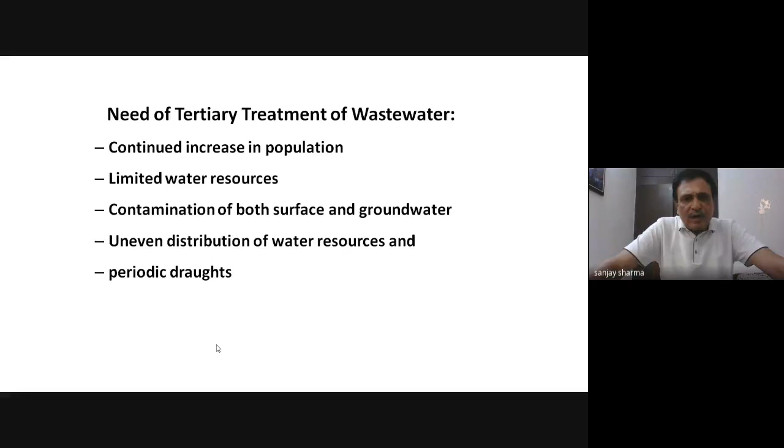So that is why there are so many advantages of having tertiary treatment of wastewater. The selection process for any treatment depends upon the potential use of the treated effluent, the nature of the wastewater, the compatibility of various operational processes, the available means to dispose of the ultimate contaminants, and environmental and economic feasibility of the various systems.

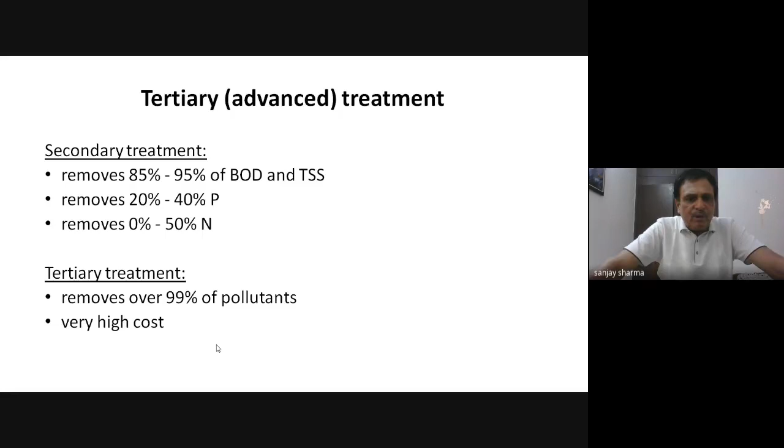If you go for tertiary advanced treatment, you will find that secondary treatment removes 85 to 95% of BOD and suspended solids, 20 to 40% of phosphorus, and up to 50% of nitrogen. Whereas tertiary treatment removes over 99% of pollutants, but at a very high cost. The advantages of tertiary treatment are effluent polishing, nutrient removal, and toxin removal, like metals, etc.

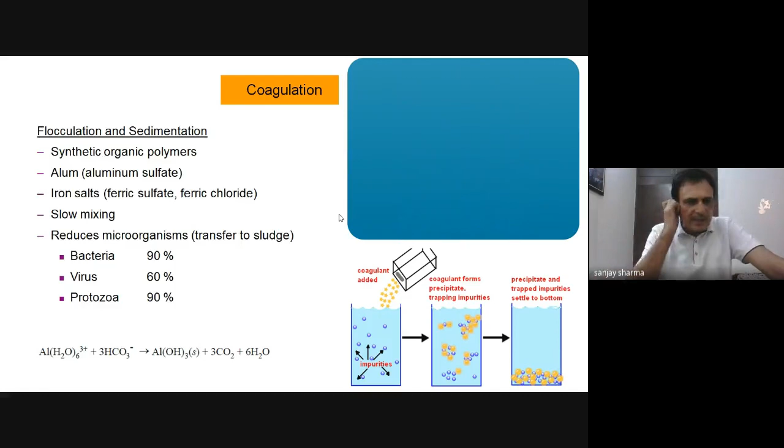So bacteria, virus, protozoa - in this particular system we can remove up to 90% bacteria, 60% virus, and up to 90% protozoa. Filtration, we have seen, is again for removal of flocculated matter, organic matter, microorganisms, and mineral colloids.

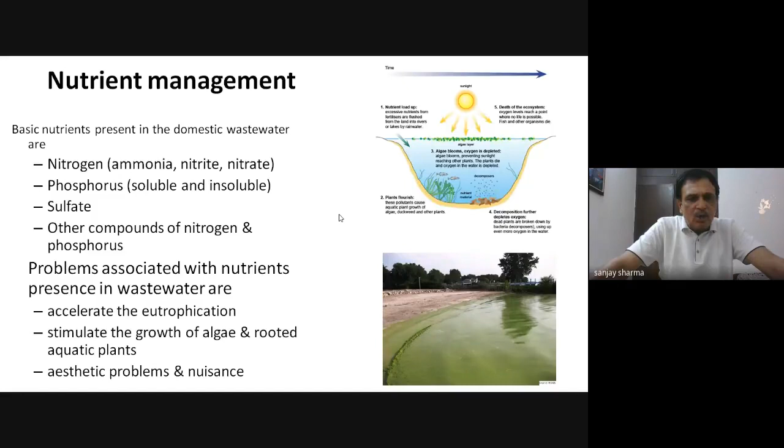Then nutrient management is to be done, where we have to take care of nitrogen and phosphorus, because the problems associated with nutrients are that they accelerate eutrophication, stimulate the growth of algae and rooted plants, and pose an aesthetic problem and nuisance, etc.

Depleting DO concentration is there, toxicity to the aquatic life is there, increasing chlorine demand, and then public hazard, etc. So nutrient control is to be directed by physical methods, chemical methods, biological methods, dilution, and plant uptake, which we have already discussed earlier in our part also.

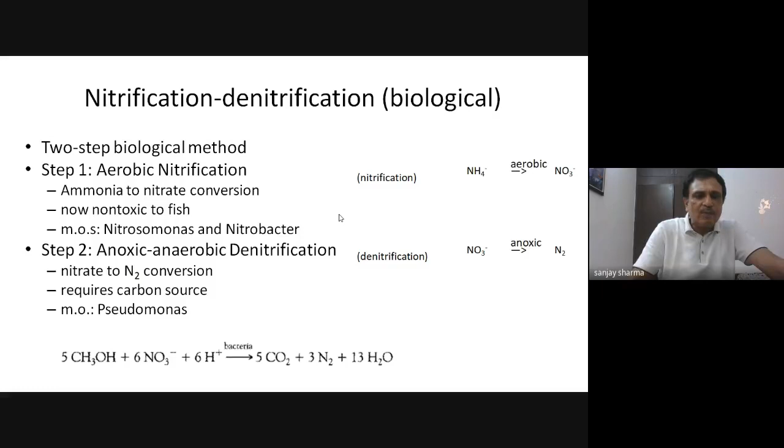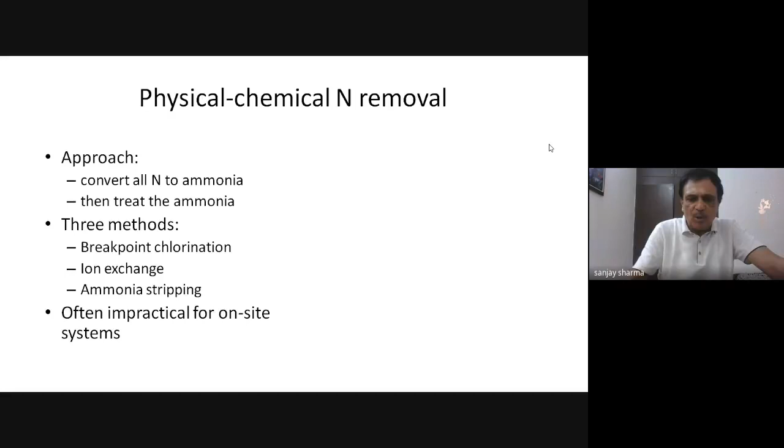So basically we have to convert all the nitrogen to ammonia and then treat the ammonia. There you have three methods: breakpoint chlorination, ion exchange, and ammonia stripping. In ammonia stripping, you raise the pH to 12 to 12.5, convert ammonia to ammonia gas, and in the air stripping you cascade the wastewater countercurrent to the airflow, and ammonia gas escapes to the atmosphere. So basically you have to take care of that.

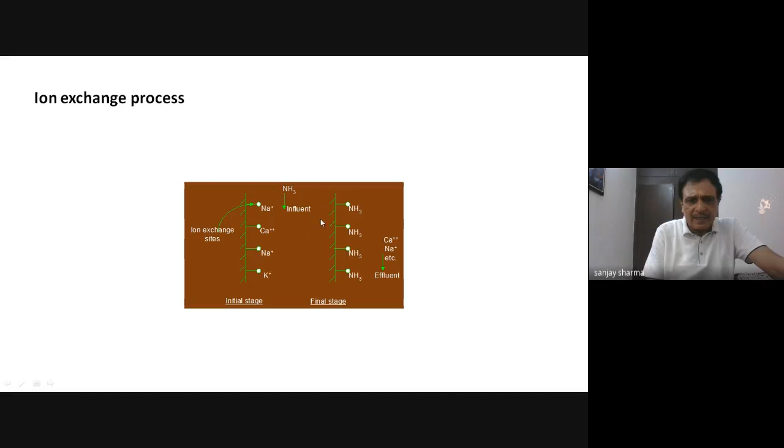Similarly, phosphorus is again removed by this step system or by sequencing batch reactors. It can be an aerobic reaction in this case also. So the phosphorus is basically removed through precipitation, coagulation process, etc.

Toxicity removal, as I said, is the most difficult one because we have to take care of the things used in toxicity removal. The main strategy is to either reduce, then eliminate totally, then treat, then segregate and dispose. So prevention is the best technique. Protection is again to be adopted, and treatment is the next.

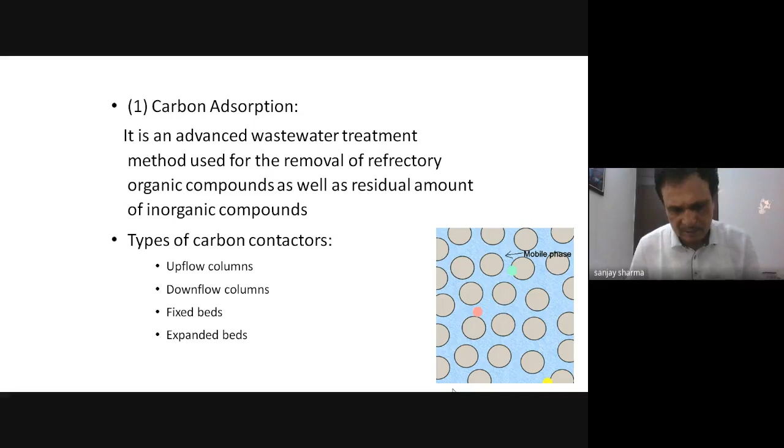Treatment-wise, there are many techniques: biological treatment, oil-water separator, air stripping, thermal treatment. The more common technique is adsorption using activated carbon. This is carbon adsorption, which I have already shown, the carbon column reactor. It can be a single or double sort of system: single column, double column, or maybe a continuous flow type of system.

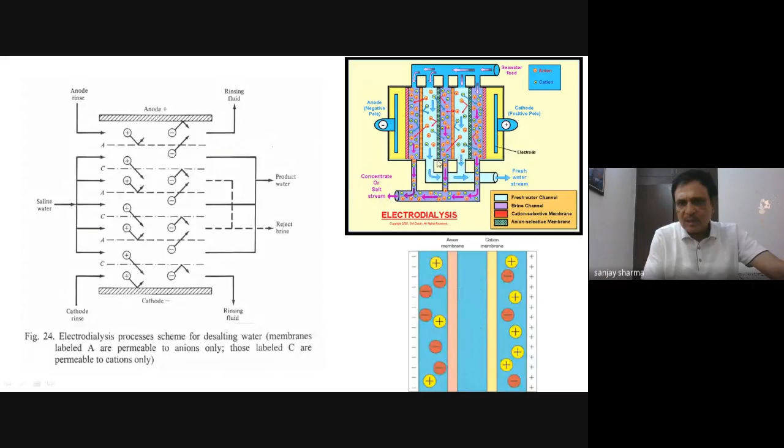This is the electrodialysis process, where electricity is passed and the negative and positive ions are separated out, and deposition of these metals takes place at the bottom. So the electrodialysis process can be utilized to remove these. Then disinfection commonly uses ozone, chlorine, and ultraviolet UV rays. Sludge we have already discussed, and discharge we have already discussed.

And this is one of the case studies with reference to rivers and water bodies. This was the Thames River, which was almost dead in 1957, with virtually no DO. But now it has been restored, and about 125 species of fishes are there, more than 400 species of invertebrates, and various types of birds, sea birds, waders, etc.

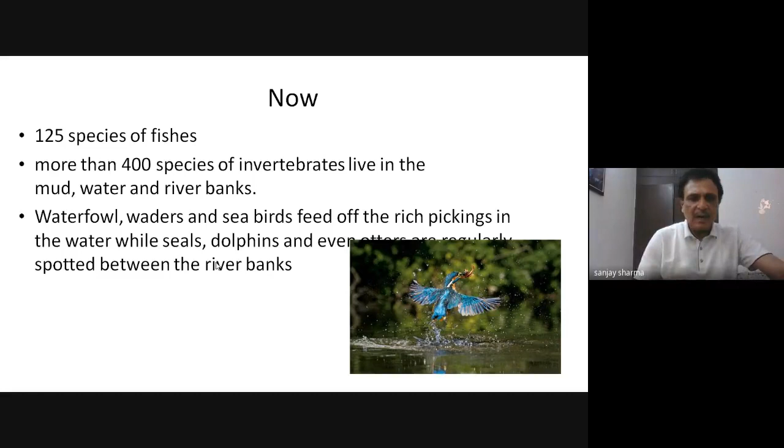Baba Seechewal is also an example who, in Punjab, by his own single effort, has taken the initiative to remove this sort of pollution. So we have to take care, because we cannot live without water. Thousands have lived without love, but not without water. So water is precious, and water treatment is one of the things which we have to adopt as engineers, and we have to see that this pollution gets less.